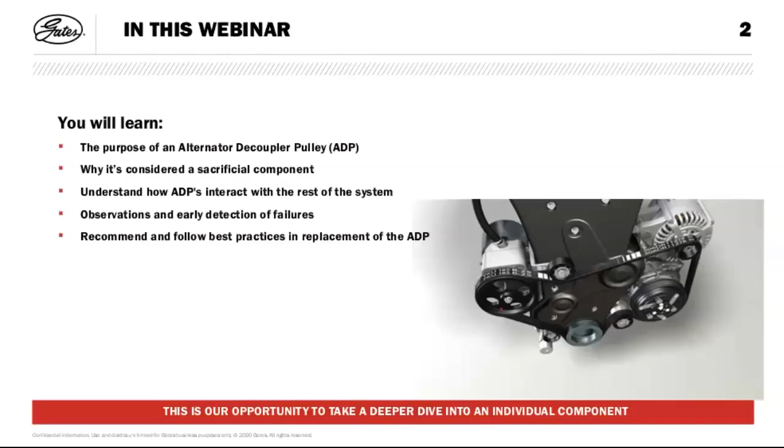To understand the alternator decoupler pulley, you've got to understand the system that it works within. And the ABDS system, that's what we call it, it's the accessory belt drive system. It is complex and it takes some explanation and understanding of the complete system.

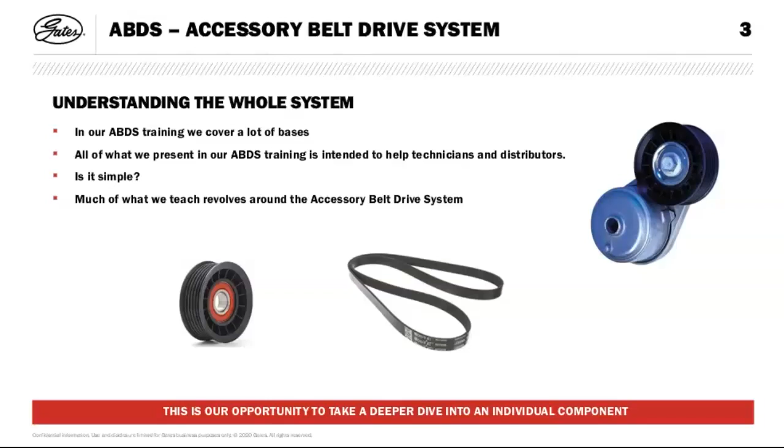Understand the possible underlying causes of any problems and any failures. Also note the system is designed in conjunction with the OEMs to be able to transmit the required power to adequately turn the accessories that it's meant to drive. That's why some belts have 4 ribs and some have 14, because it's constructed to transmit power between components. We're going to also talk about how critical belt tension is in this system and the ability of the belt to wedge properly in the pulleys to transfer power to the accessories. So it's an important part of a vehicle operation, the accessory belt drive system.

That's what it looks like. That's some of the other components within the system. We obviously are familiar with things like the belts, but there's the overrunning alternator pulley that we're discussing today, idlers, tensioner units, crankshaft dampeners as well. And you find these in all makes and models of all cars in our marketplace.

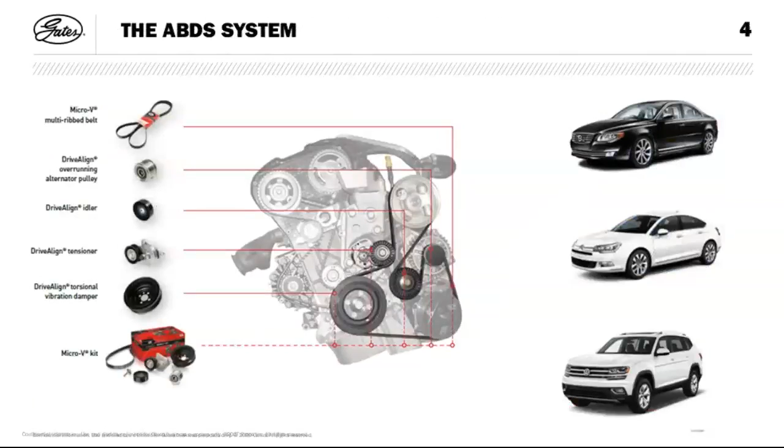We like to use a phrase called Be System Smart. And that very simply just means look at the complete system in its entirety, don't focus on a single component. When the technicians out there are repairing a belt or replacing an alternator pulley or something like that, look at the complete system and make sure you inspect it well and give your customer the best possible advice on how that system operates and what's needed to maintain that system or what parts need to be replaced to make sure that system is operating adequately and efficiently.

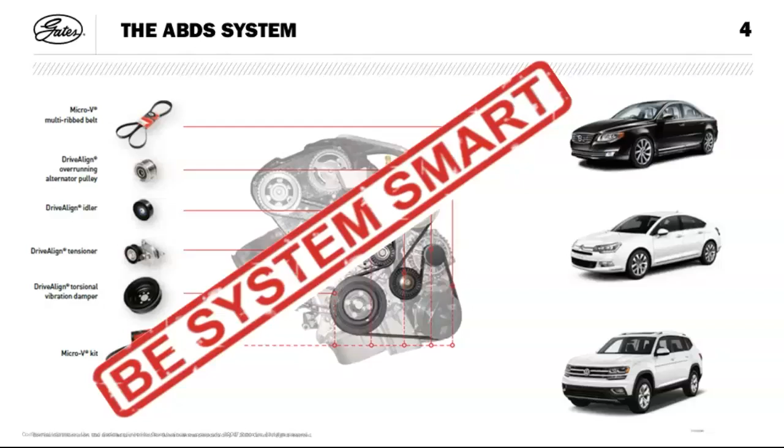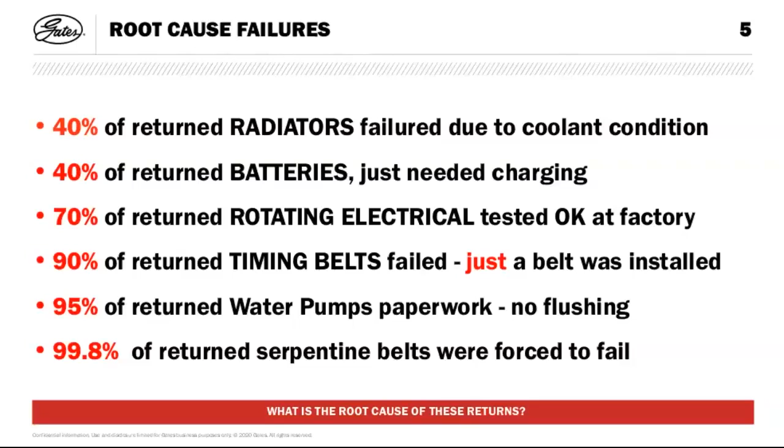So today we're going to touch base on 3 of these. The first point is that our research has shown 40% of batteries just needed charging. I wonder what that meant for the alternator - was it an issue with the alternator? Or maybe the decoupler pulley wasn't performing well and was actually freewheeling when it should have been engaged.

70% of rotating electrical alternators tested okay at the factory. Was it a fault with the alternator, the reason it was returned? Or was it something else - was it the belt, for example, not enough tension on the belt? These are all scenarios and examples that happen out there in the field.

The last one, 99.8% of serpentine belts were forced to fail. Sounds a bit dramatic, but belts put onto systems that did not allow them to reach their targeted life - that's what we're talking about. So there was something within the system that contributed to an early failure of that particular component, which in this case is a drive belt.

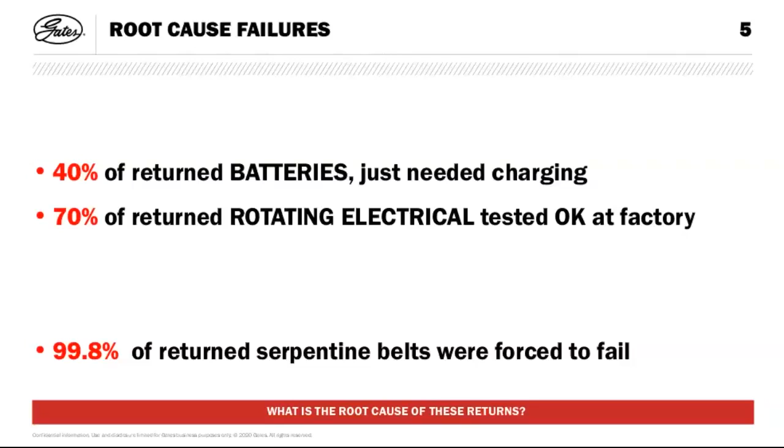What we'd like to do is understand what is the root cause of these returns. I think it's important not only for us as a manufacturer, but for technicians and even parts resellers to really understand the causes behind some of these failures. So we open with these slides just to open your mind a little bit, to understand that there are other contributing factors to any components within that system.

The pile of belts also represents a job that's had to be done twice, because the belt's been fitted, for whatever reason the belt's then come off the vehicle and been returned to the distribution point. Sometimes what seems like a belt failure is not really a belt failure, but could be a failure of another component within the system.

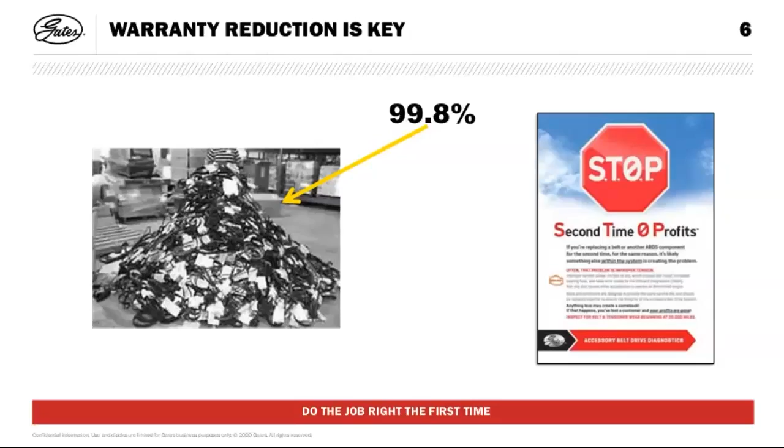So we want to understand the issue and share our knowledge and research to ensure that we adequately respond to any situations where one of our products is not adequately performing. It's really important as a manufacturer to know what these are and when these happen, and to get them back to us.

Service, when we talk about it, and the Be System Smart message relates to this as well, we look at servicing the entire system. When we talk about a system that isn't operating properly, we want to know about the root cause and the impact this may have on other accessories within that system - how the alternator may not function correctly if the alternator is replaced and the tensioner is not.

You're replacing an alternator, it's not giving you the right readings, or you think there's some issues there. The alternator comes off, it gets returned to the manufacturer, and we see that there is actually no problem with the alternator at all. We really need to understand the effects of improper tension or even alignment, and get our recommendation to get the job done the first time.

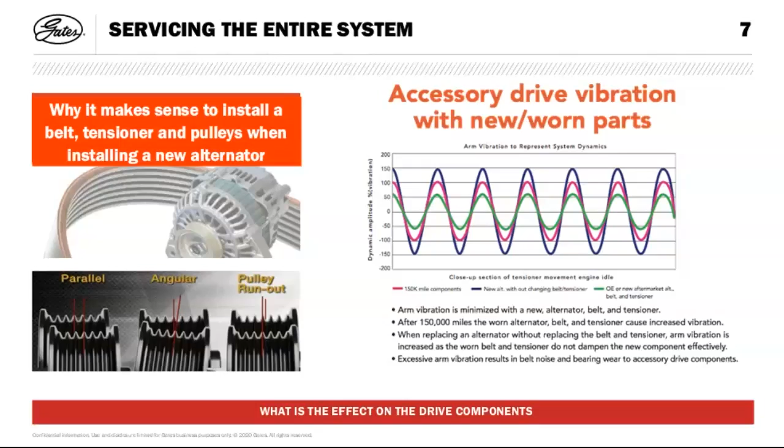That's very important, and very important to a lot of the apprentices out there on the call that are learning this for the first time, who may not have seen or been involved with the replacement of some of these components. So getting the job done the first time is our aim - I guess it's any technician's aim out there.

The first is tension. Any belt drive system within a vehicle has to have tension for it to operate, and the belt tension required is predetermined by the amount of power we need to transmit. The tension is basically the friction between the V grooves on the belt and the corresponding grooves in the pulley, and it's that friction that transmits power to the accessories within that system. So belt tension is determined by power.

It's the requirements of each component that add up to what the OE engineers into that system. Improper tension will cause premature wear, and inadequate tension could give you belt noise or false engine codes because the belt is slipping through the tensioner. So tension is one of the three most important considerations to any belt drive system.

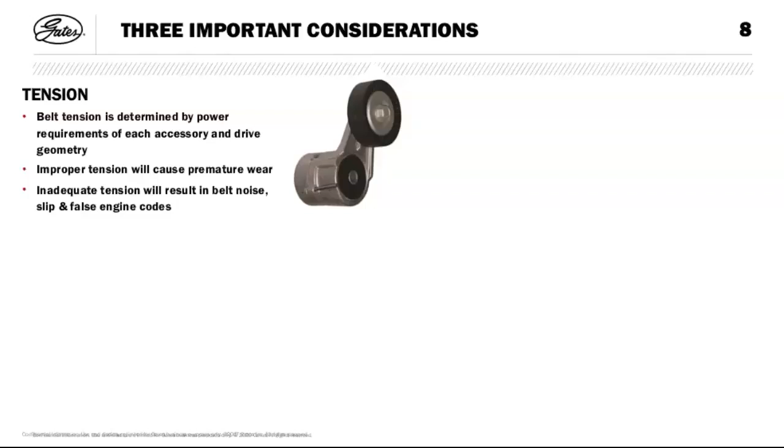The next important consideration is damping. Damping is basically smoothing out the peak loads within the system coming through from the belt. The belt experiences a lot of vibration because the accessories are turning on and off, so it's a mechanism where we flatten the peaks and troughs to give a very smooth drive. You'll see this graphically described later, but it's important to know damping is a critical attribute. Without proper damping, belt noise, vibration, and accelerated belt wear will happen over time.

The next one is alignment. Alignment is very critical to the longevity of the system. If you don't have correct alignment, you'll get noises, rapid deterioration, and failures. The belt must operate on the same plane as the corresponding components, so the pulleys and the belt must be in alignment with each other.

The first type is what we call parallel misalignment. Basically, the two pulleys are on the same plane, but they're out of alignment—maybe a spacer was missed when the setup was first put on the vehicle, or during a belt or pulley change. There are tools to check that belt alignment, like a fairly simple laser alignment tool we display and demonstrate at most trade shows, which really picks up misalignment very well.

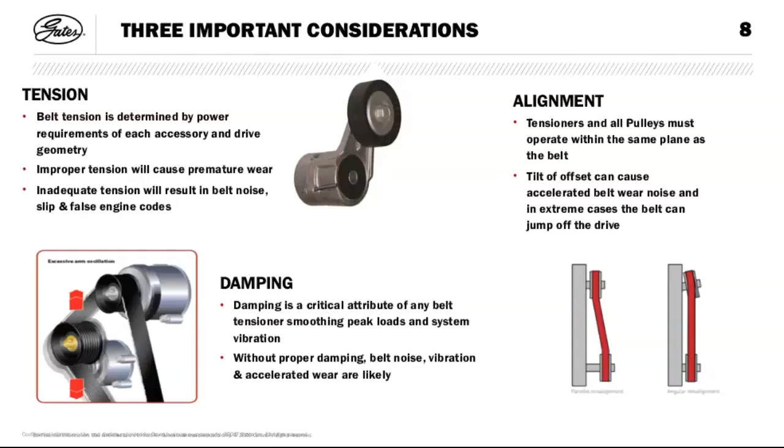Any of these three contributing factors will cause a belt to fail prematurely. If we don't have enough tension, or too much tension, if we have inadequate damping because our spring and tensioner aren't performing well, or we've got a misalignment problem, we will cause that belt to fail early—prematurely, 99.8% of the time. So, three very important aspects and considerations for any belt drive.

Now, due to the bandwidth this isn't playing, but let's go on to this animation here on the right-hand side, demonstrating what we call belt flutter. I'm hoping you can see it—on the right side of this animation, as I keep playing it, we see the belt fluttering, and it's fluttering for a number of different reasons.

The first reason is a long span between pulleys, so the belt flutters because it doesn't have any support between them. But also, perhaps the tensioner has lost its ability to dampen, and the system has lost tension. The tensioner has two basic functions: to provide tension, and to dampen the peak and trough loads within the system. Another reason the belt could be fluttering is that the belt has elongated.

Now, an elongated belt isn't new—it's actually quite normal. Over time belts wear, and they stretch. The tensile cords within the belt are typically made of polyester. We'll talk about some other unique materials in a second, but if the belt is worn beyond its life, you'll get elongation and belt fluttering. Some fairly new applications in our marketplace suffer belt elongation quite early and can cause catastrophic failures, not only to components within the drive belt system, but other associated components as well.

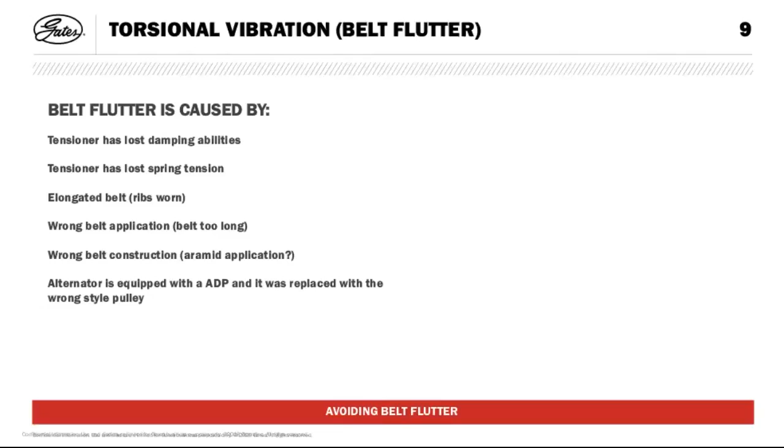Now, I guess this is the main part of our presentation. Why an alternator decoupler pulley? You might ask yourself why, why is it necessary, why has there been such a dramatic change? But the answers are pretty simple. The steel pulley's been around for so long, why is it no longer sufficient? I guess the answer's right there on my screen.

Years ago, a standard sort of 60 amp alternator was pretty standard, and the steel pulley was acceptable. That alternator was enough to drive all the electrical components on our vehicle, put some power back into the battery, and power the system adequately. But over the years, as vehicles and technology have progressed, the size of the alternator has certainly changed as well. We've gone from a 60 amp alternator to a 270 amp alternator.

In some heavy vehicles and construction vehicles, the alternators are even bigger again. We understand in some bus fleets they're right up to 600 amp alternators, so they don't talk about alternator decoupler pulleys, they talk about monster decoupler pulleys. As vehicles have progressed and technology has advanced, so has the size of the alternator, and there's a sizable difference in weight and capacity of the two side by side. You can actually physically see it.

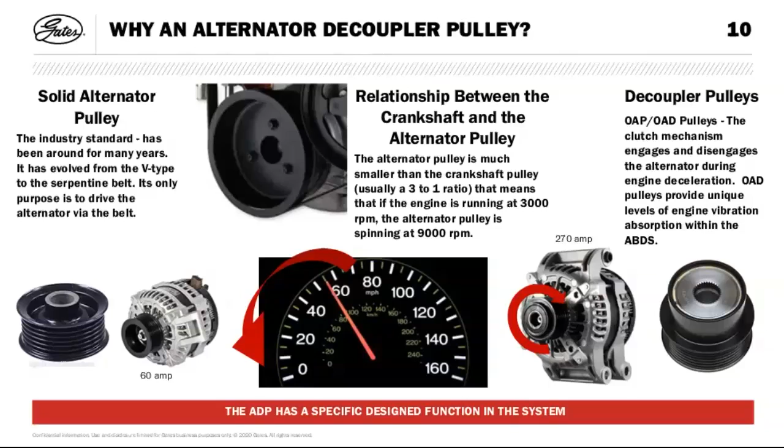I should have maybe got that graphic to come up a little bit earlier, but that's the deceleration - we're going from speeding in a vehicle to trying to get that vehicle to stop. And even at a complete stop, that alternator pulley will continue spinning for about 10 to 15 seconds after the vehicle has come to a complete stop.

So alternator decoupler pulleys, what do they fit? Well, you'll be surprised - there's millions of vehicles on our roads in Australia today that have them in their system. Worldwide, there's about 150 million vehicles on the road using this particular system. OEMs have certainly embraced this technology, and all major makes globally are using it within all their models and engine variants, even petrol and diesel applications - transit buses are certainly using these.

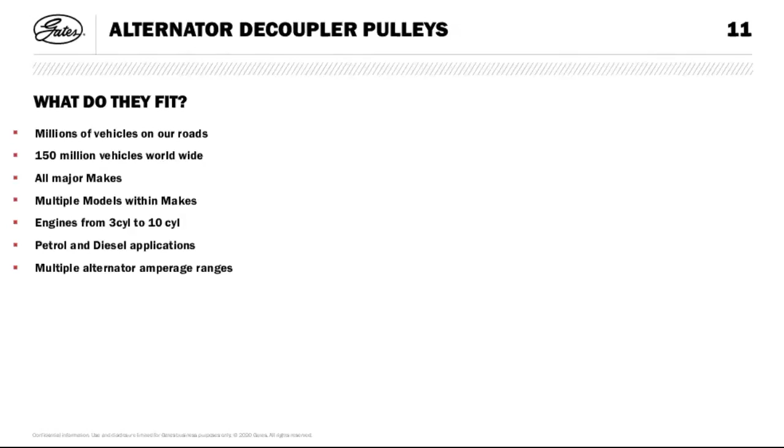They fit many, many millions of vehicles on our road today, so they are definitely an item you will come into contact with. But what does surprise me is when we're talking to technicians at different trade shows and trade events, and we have them displayed on our stand, it is rarely an item that gets a lot of coverage. We don't talk a lot about it. Maybe there's a bit of misconception on what it does or why, or some mystery in how it works. I hope I've been able to clarify and demystify some of that for you. It is essentially a fairly complex piece of equipment, but performing a very essential task.

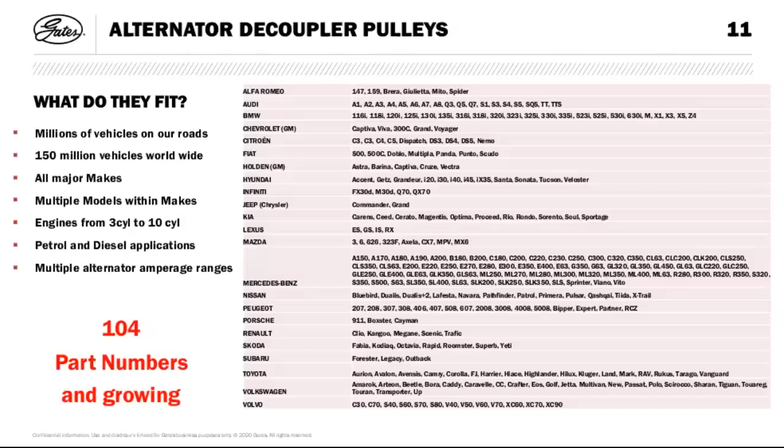Just had some of the recent trends with decoupler pulleys, and these are some of the announcements the main manufacturers have made. Toyota or Lexus - 95% of new Toyotas, Lexus within North America, I got this slide out of the US, come equipped with an alternator decoupler pulley, and that's in all 4 and 6 cylinder vehicles. Even more so, GM - every new 4, 6 and 8 cylinder engine being designed today will come with an alternator decoupler pulley. Hyundai's got them in all their 4 cylinders.

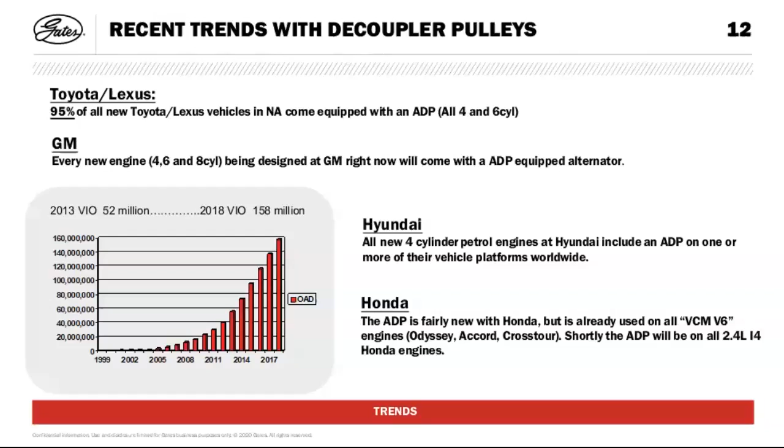And Honda, it's very, very new to Honda - they haven't embraced it as yet, but their intention is to put them into V6 engines, the Odyssey, Accords and so on, and will also be in some platforms using the 2.4 litre engines. So in 2013, about 52 million vehicles worldwide, and in 2018, over 158 million are using this technology today. So it is definitely something you'll become more and more familiar with if you haven't already.

Different styles. Now, I've spoken about the generic name, the Alternator Decoupler Pulley, but there's actually essentially two different types.

There's one we call an OAP, which is an overrunning alternator pulley. Simply, during deceleration, that system disengages so the pulley can free spin, or freewheel. It's a clutching mechanism that only turns in one direction, allowing the alternator to free spin without damaging other components. It will re-engage when the speed is down to an adequate RPM, and it re-engages as the vehicle takes off.

Quite simple. The next one is what we call an overrunning alternator decoupler. It has the same basic function as the overrunning alternator pulley, but it has a special feature: a torsional spring combined into the assembly, which adds the ability to take vibrations out of the system. It incorporates an additional spring that dampens the vibration or harshness, giving the whole system a much smoother, more accurate drive. These are the two main types we see in the market today.

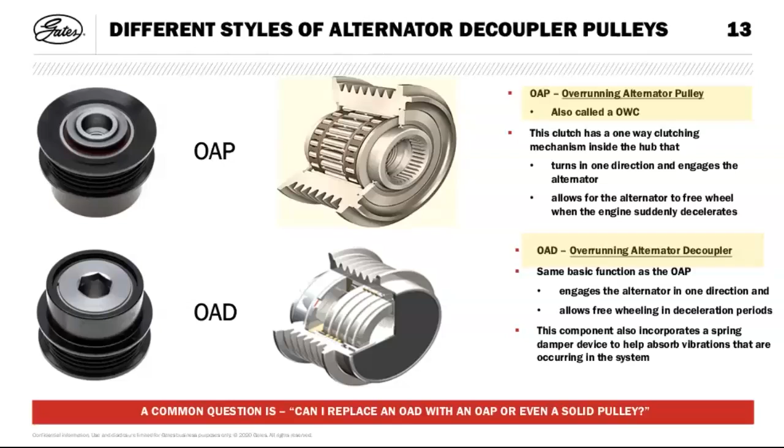Technology will continue to advance, and some of these will become smaller. Some will also be able to assist the driver in the drive system itself, through advancements in the integral part of this system, and basically in their clutching abilities to drive this system.

These are meant to be three animations, but I will explain them to you, and we'll go through them one at a time, and I'll talk through what this particular demonstration setup was.

On the right-hand side, we've got a setup with an overrunning alternator decoupler. There's the alternator on the top left of that assembly, using the overrunning alternator decoupler. Let's call that the base step. That particular system is ironing out all the vibrations and peaks and troughs within the system.

To try and replicate motoring conditions, we spiked that system by engaging and disengaging air conditioners, revving the engine, and so on. The animations show considerable belt flutter between the tensioner pulley here and the alternator there. We actually see this belt fluttering around quite considerably, and that's not what a belt wants to do. Belts do not want to flutter. A fluttering belt leaves the drive momentarily without adequate power.

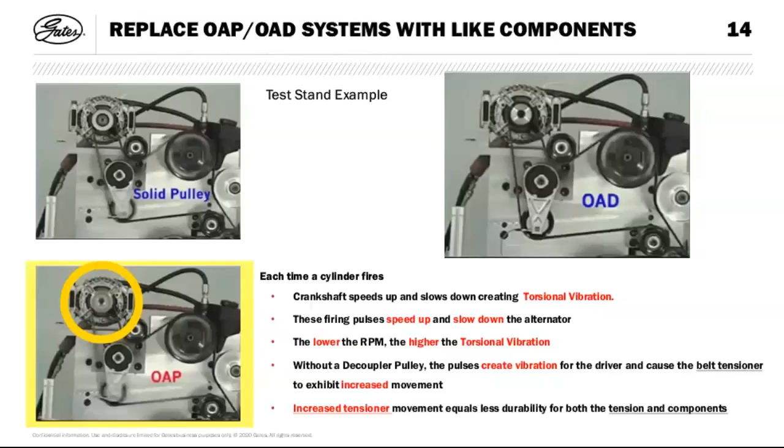I'll move on to the next slide because hopefully this will work. This is only a very short slide, but we'll go through it a couple of times and explain as we go. So there we go. We've got a system that's been injected with all sorts of spikes and troughs in the power.

Using a solid pulley, we see that the amount of belt flutter is considerable, as it's trying to smooth out all those peaks and troughs, and the tensioner pulley is doing its best to smooth that out. You can see other areas of the system where the belt is relatively smoother than what we see here between the two pulleys.

Now using the overrunning alternator pulley, we see that those peaks and troughs in the load on that belt have been smoothed out. We'll just go back to it a second. It has been smoothed out considerably. So you see the science behind there, and the reasons why we need to slow that system down.

Belt flutter is not good for a system. We're taking the energy out of the system at the inappropriate time.

And there we go, the overrunning alternator decoupler - that's the one with the additional torsional spring inside. We can see the effects on the belt as it comes back. The overrunning alternator decoupler is taking up all that torsional vibration. The tensioner is doing its job, the tensioner is protected, the whole system is protected because we're not getting that belt slapping around against the other components and causing additional peaks and troughs within that system. Very, very important for the longevity and reliability of that system that this decoupler pulley is working adequately.

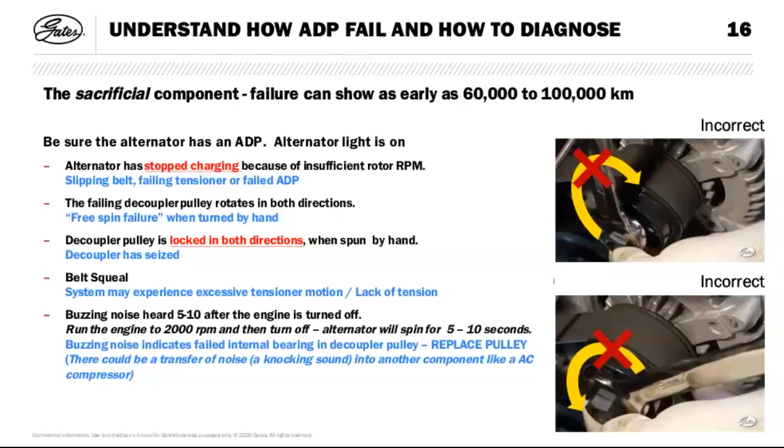The next slide here is just on replacement and the disengaging of the pulley. There are tools available - Gates certainly have a toolkit that works its way into the splines of that pulley, but just following those simple eight steps will disengage the pulley from the alternator. The specialised tools, the splines on those keys are unique, so you need the right tool to be able to pull the thing off.

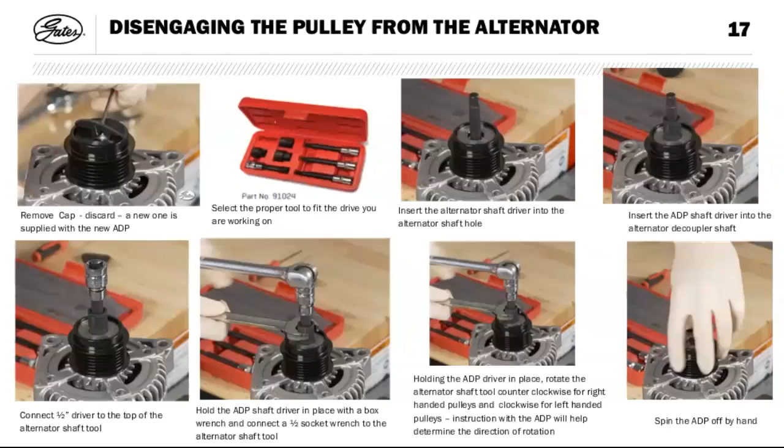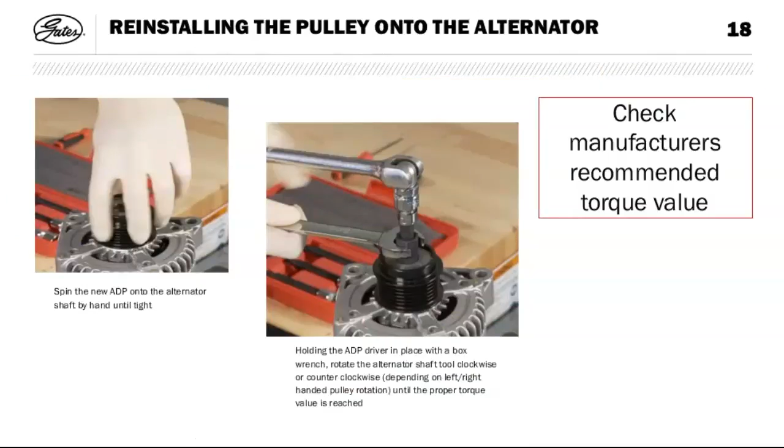To reassemble, just basically do it in reverse, again using the right tools. Some sockets and the splines will engage in your tools and you'll be able to put it on. Very, very important to check the manufacturer's recommendations when we talk about the torque value to do that final nip up. So please be aware and check those manufacturer's recommendations.

We're just going to recap a little bit on the different pulleys within the system. There is a solid pulley - what we used to have years ago, with small alternators driving limited electrical components within the vehicle. Small weight, low inertia, low consideration in terms of protecting the other components within that system. Been around for a long time, and we'll probably still see them for a little while yet.

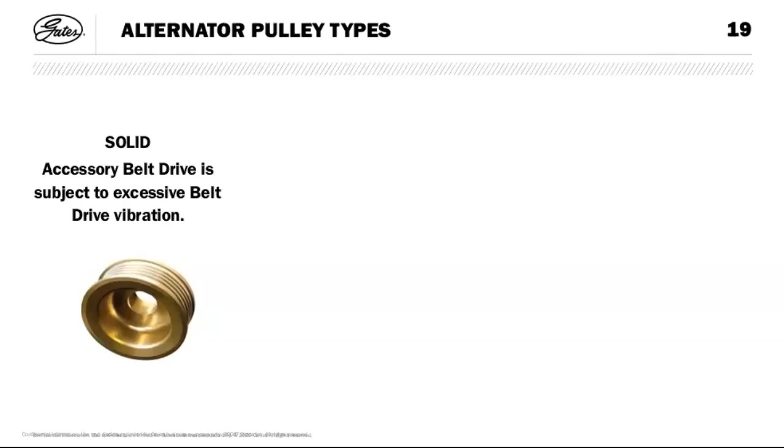The next step up is the overrunning alternator pulley, and it reduces belt vibration. It has that clutching system which will allow the pulley to freewheel under decelerations. What it does also is reduce premature parts wear. So a real important advancement in the technology of these pulleys.

And the current day, or the more robust solution, is the overrunning alternator decoupler. It has exactly the same features and benefits as the overrunning alternator pulley, but has that internal torsional spring that also absorbs vibration. And that's a really, really important characteristic.

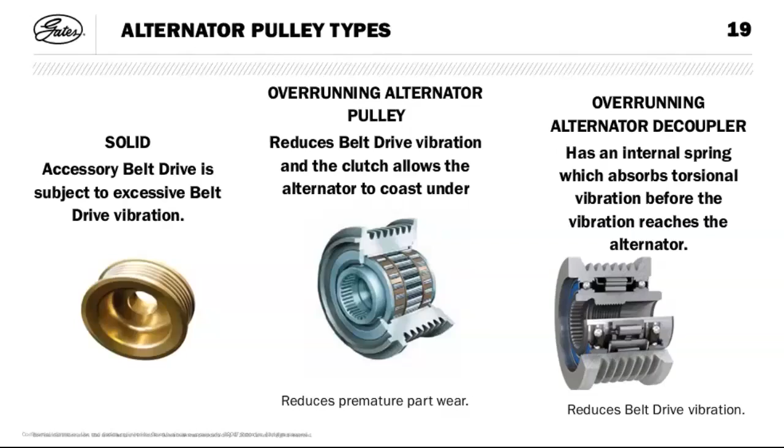I'll flip this one blank, and this one - I hope you get a bit of a chuckle out of this. And what we do when things go wrong, or why do things go wrong?

Alternator decoupler pulleys are an advancement in technology within our vehicles, and there's sound reasons why they've been implemented. The reasons are protecting the system, using more robust components like your alternator to drive more accessories, because we as consumers have demanded those accessories be implemented into our vehicles, because we want the seat warmers and all the electrical stuff that's going on. And I dare say this advancement will continue.

But there is one natural enemy of an alternator decoupler pulley, and it's this guy - with the high pressure water cleaning under the engine, or under the bonnet, cleaning out the engine. And look, he probably thinks he's doing a great job, and I'll tell you what, at the end of this, it's going to look a million dollars.

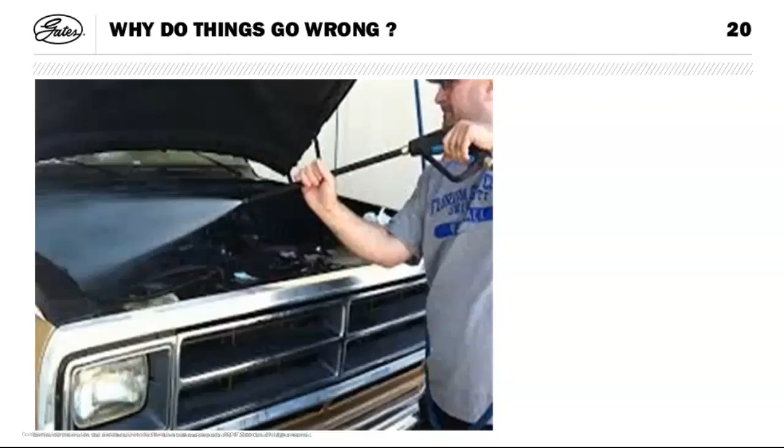But the seals within these units are pretty exposed. There is a cap on them, but moisture can get through that cap and work its way into the bearings. If you start hearing a chirp or a bit of a rumble or indeed a hum within that bearing, within that system, it is time to replace it, because contamination within that system causes catastrophic failures, and it will actually seize that system. What happens when that system seizes is very, very simply, your belt turns to spaghetti.

We actually received this belt back through our warranty department saying our belt failed and gave us really very limited indication as to why. And we finally determined the cause of failure was a seized alternator decoupler pulley. So it's not only the belts and the inconvenience of the replacement, but it also wears out some other associated components - they end up with holes in all sorts of covers and bits and pieces. So please avoid that. Avoid going in hard with a high pressure water cleaner anywhere near this component.

There is a fair bit of science in there, and it's a precision product. It's not a simple bit of science and technology there - it is a precision product with precision bearings in there. And even though the seals within that system are full contact seals which contact the inner rings, there will be moisture and ingress that can work its way through. And once we do that, we get the lubricant within that bearing to dissipate, and you get a seizure pretty quickly.

Okay, I'm going to wrap up and just do a bit of a summary. And look, we again close off with Be System Smart, and it's looking at the complete system - looking at the complete system to keep your customer's car on the road, be it a technician, an apprentice, one of the lecturers at the TAFE colleges. It's really important to look at the system as a whole.

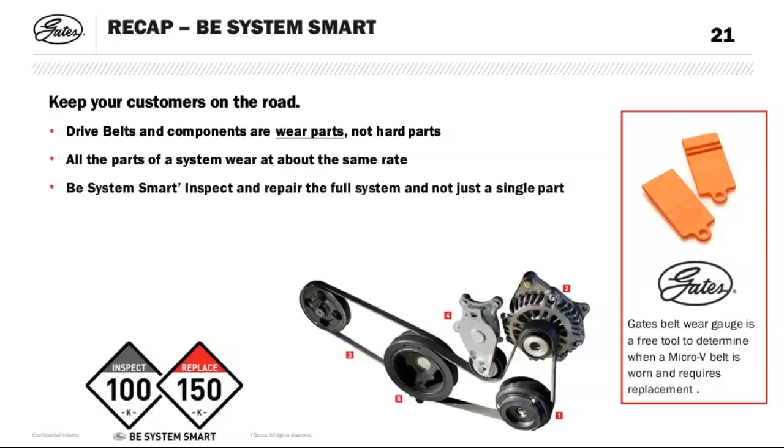They're all designed to wear at the same rates, so be system smart. Inspect and repair the full system, not just a single part. Consider the idlers, the alternator decoupler or overrun pulleys, the belts, belt tensioners and vibration dampeners, any crankshaft pulleys, anything within that system that might need to be inspected, replaced, or refreshed to bring the system back up to an efficient system. So there's our Be System Smart message.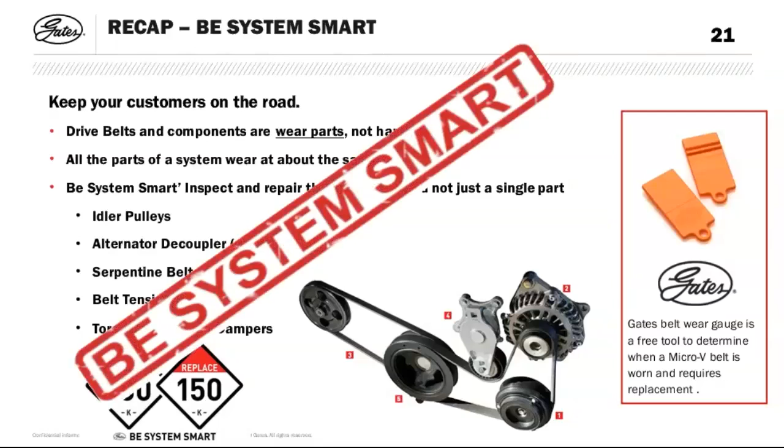However, if you are unsure, always seek professional advice from either the vehicle manufacturer or the spare parts shop. They will have our catalogues on their system that will bring you to the right belt selection. It's very important that you put in the right belt made with the right construction for that vehicle, and that it's not a belt that's too long or too short in that operation, because the tensioner only has a certain degree of tensioning ability. If we go beyond that, we may compromise the system to the point where we're not getting adequate belt life. So it's very important.